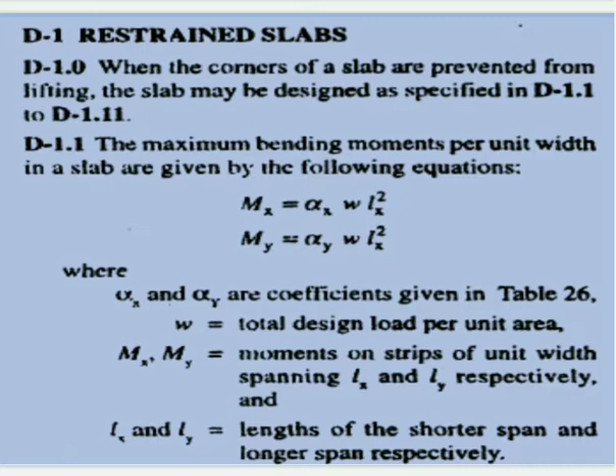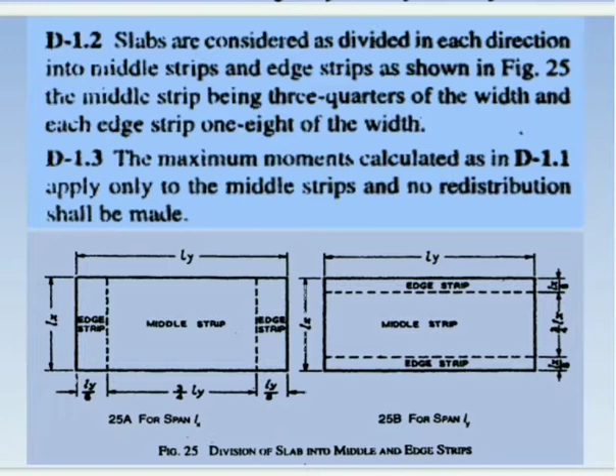Going further, in a restrained slab the reinforcement to be provided is divided into two strips: the middle strip and the edge strips. This happens along both spans, that is along Lx as well as along Ly. A detailed description of this is given in clause D1.2 of IS 456 2000.

Next is the different types of slabs as per the IS classification based on edge conditions. Edge conditions play a very important role in the design of slabs because, depending on the edge condition, the position of the reinforcement will be decided. We have 9 cases, starting from interior panel number one, where all four sides of the slab are continuous, and that panel falls somewhere in locked surroundings.

The second condition is one edge continuous, that is the short edge continuous. The third condition is one long edge discontinuous. Next is two adjacent edges discontinuous. The next condition is two short edges discontinuous. Next is two long edges discontinuous. The seventh is three edges discontinuous with one long edge continuous. The next condition is three edges discontinuous with the short edge continuous, and the last condition is four edges discontinuous.

Always remember, while solving examples based on the restrained slab, if any edge condition is not given, you have to assume it is condition number 9, that is all four edges are discontinuous, as shown in the figure below, where all four edges for slab number 9 don't have any continuity on any side. So if in an example no edge conditions are mentioned, directly go to condition number 9 for selecting alpha x and alpha y. Whereas if the conditions are mentioned, you have to select the proper condition from 1st to 8th.

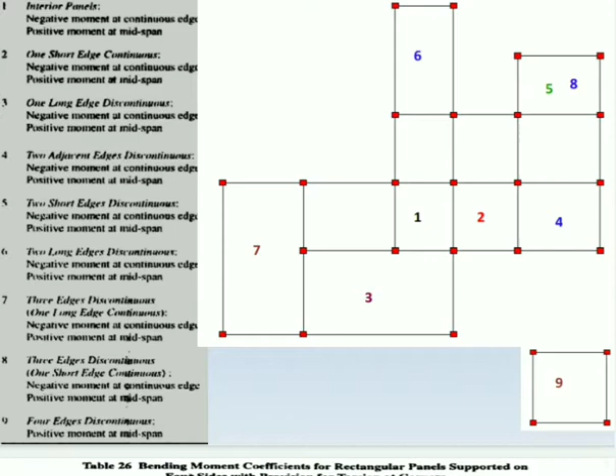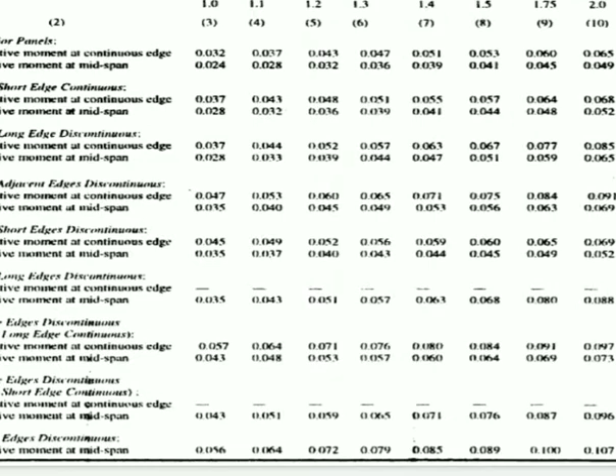Then this is the table which will give you the alpha x and alpha y coefficients. So depending on your Ly by Lx ratio, you have to select the proper edge condition and select the proper alpha x and alpha y value. This will be more clear when we solve one example.

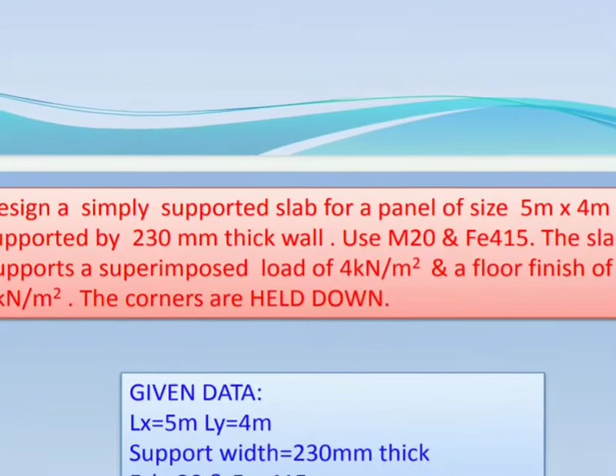Now let us start with a design example for a simply supported two-way slab with corners held down. The example goes like this: Design a simply supported slab for a panel of size 5 meter by 4 meter, supported by a 230 mm thick wall. Use M20 and Fe 415. The slab supports a superimposed load of 4 kN per meter square.

And a floor finish of 1 kilonewton per meter square. The corners are held down.

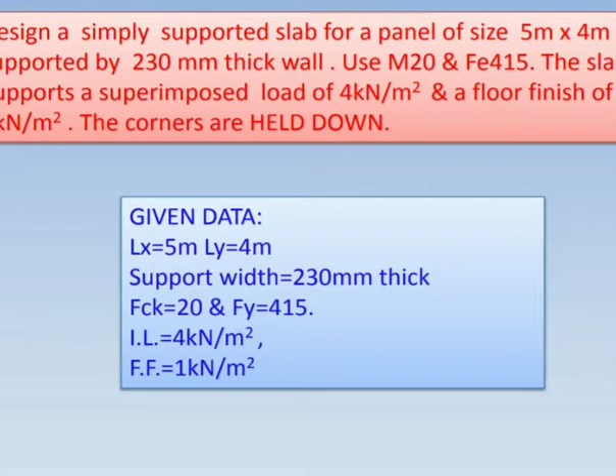So let us first note the given data. Lx is equal to 5 meters — sorry, Lx is equal to 4 meters, Ly should be 5 meters, please make the correction. Support width is 230 mm, FCK is 20, Fy is 415. Live load is 4 kilonewton per meter square and floor finish is 1 kilonewton per meter square.

So let us start with the check. Ly by Lx — the longer side is 5 meter, shorter side is always Lx, which is 4 meter. So we get a Ly by Lx ratio of 1.25, which is less than 2. Hence we have to design the slab as a two-way slab.

So now what happens here is we have to go for the design of a two-way slab, but the edge conditions are not mentioned clearly. Hence, as I told you earlier, we have to refer condition number 9 for taking the coefficients alpha x and alpha y, so we have to read the example carefully. As it's a restrained slab but no edge conditions are mentioned, it indicates that you should refer the ninth condition of the IS 456 code book table number 26.

So further in the example we'll come across it.

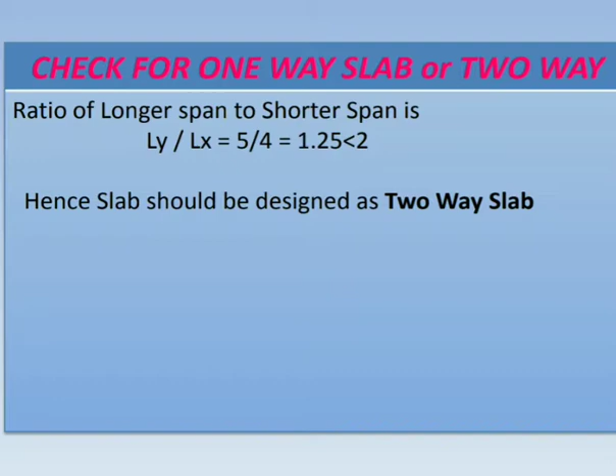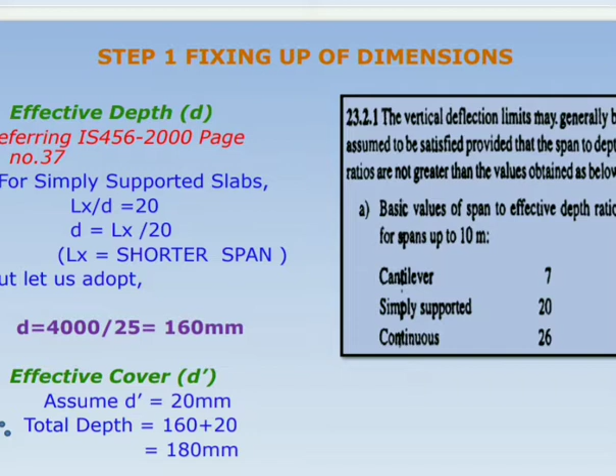So the first step, this is a common step wherein we'll be fixing the dimensions. On the right side is the reference of the IS 456 code book, which says that effective depth for a simply supported slab will be the shorter span divided by 20, okay, d is equal to Lx by 20. But practically, let us adopt L by 25 as the ratio and we get depth as 160 mm. Then the effective cover is assumed as 20, so the total depth of the slab comes out to be 180 mm.

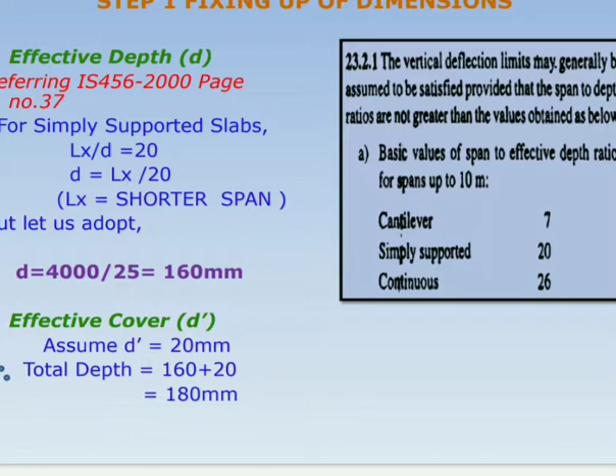Further, let us fix the effective length. Now as it is a two-way slab, the effective length needs to be fixed up in both directions, that is we got to fix up the length in both the directions — Lx effective as well as Ly effective — using our regular formulas from the IS reference.

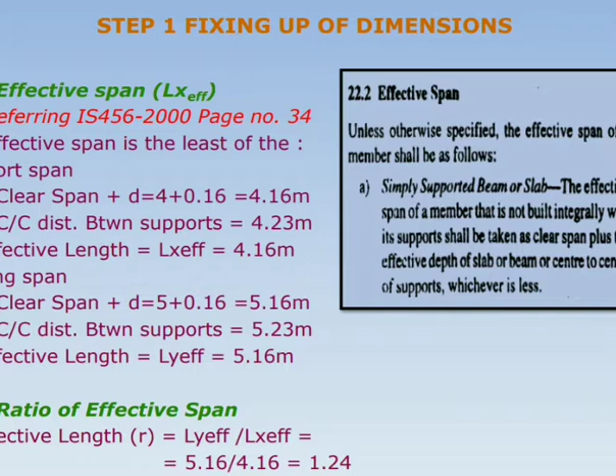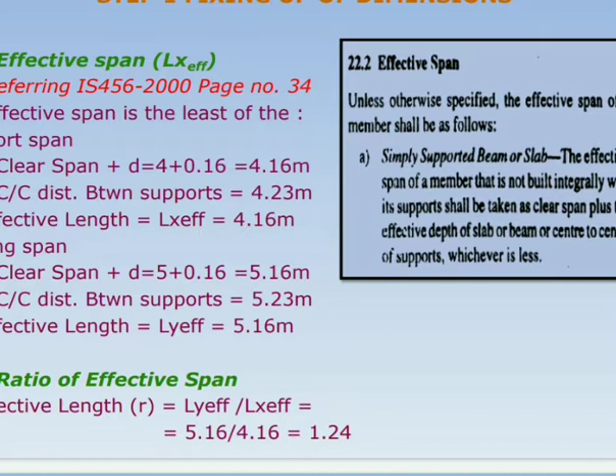Effective span along the x direction, that is the shorter span, is clear span plus effective depth, or center to center distance between the supports, whichever is least. So here we can say that the effective length is 4.16 meters. Similarly, along the longer span, we get an effective length of 5.16 meters. So let us find the effective length ratio R, which is Ly effective upon Lx effective, which comes out to be 1.24. Now these steps are basically repeated from your beam design onwards, and hence you should be able to do all these steps very fast.

So next comes the step of load calculation. As repeated earlier, always remember that for slabs you have to find the load considering a 1 meter width strip of the slab. Hence B in all calculations will come out to be 1 meter or 1000 mm. So let us go ahead with the load calculation: self weight, floor finish, imposed loads — these are the three loads which we need to calculate. Self weight is nothing but the total depth into density of the slab, multiplied by 1 meter, because we designed the slab for a strip of 1 meter width.

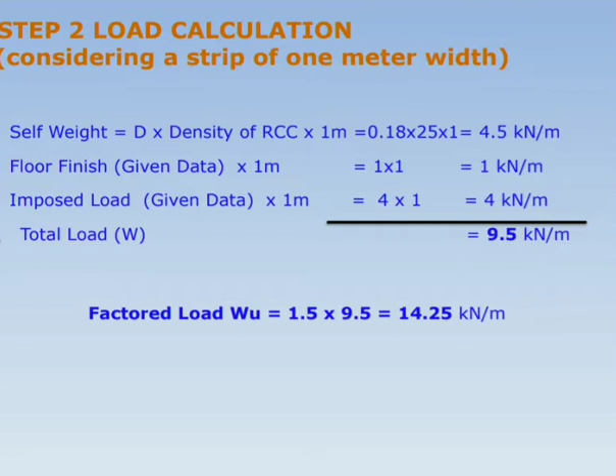Similarly for floor finish, let us multiply by 1 meter, then the imposed load, which is the given data. So total load we get as 9.5 kilonewton per meter, which is in the form of UDL. Now let us multiply this load by a factor of safety of 1.5, hence we get a factored load WU equal to 14.25 kilonewton per meter. Again, this step is very similar and easy.

So now comes the important part of the restrained slab — calculation of the design bending moment. So when we refer to page number 91 of IS 456-2000, this clause was discussed in the earlier discussion.

Mx is given by alpha x into w lx square, and my is equal to alpha y into w lx square. In both calculations, only alpha x and alpha y values change, else w and lx remain the same. Don't multiply here by ly, else your sum will go wrong.

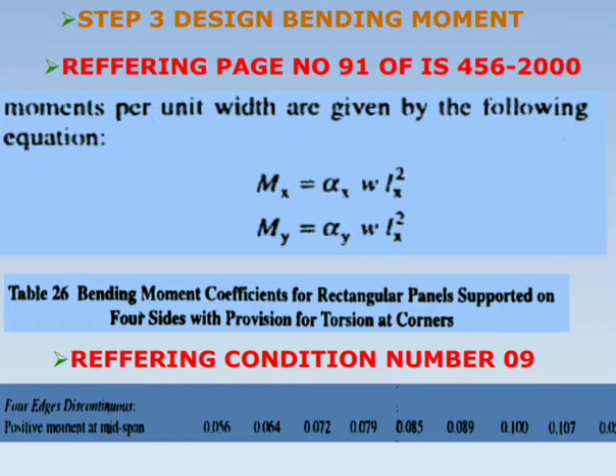As no edge conditions are given, which case do we refer to from table number 26? Yes, we refer to case number 9 from table number 26, as there are no edge conditions given. So let us take the values of alpha x and alpha y.

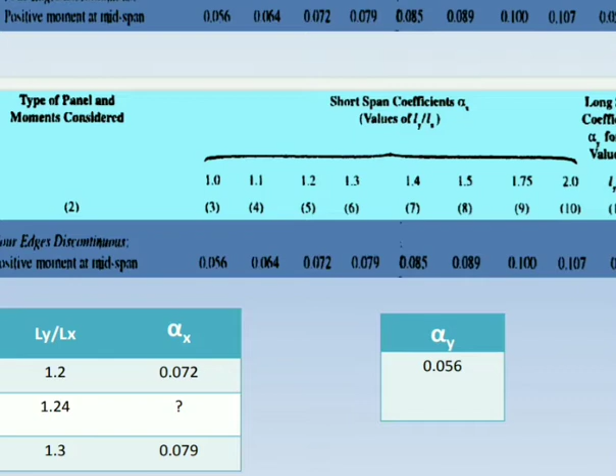Now the table is clearly visible to you all. For our alpha x, Ly by Lx effective ratio of 1.24, we will be selecting alpha x and alpha y values between 1.2 and 1.3. For 1.2, what is the alpha x value? 0.072.

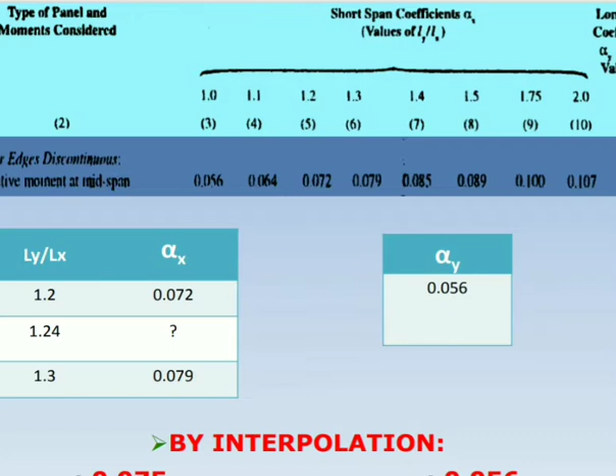For 1.3, check that value too. For 1.3, what was the value? 0.079. Our effective Ly by Lx ratio is 1.24, hence by interpolation we can find alpha x. Now alpha y can be directly taken as there are no different values here, that is 0.056. So alpha x by interpolation we get 0.075, and alpha y we keep as it is.

Now this is how we got to find the values of alpha x and alpha y for our slab.

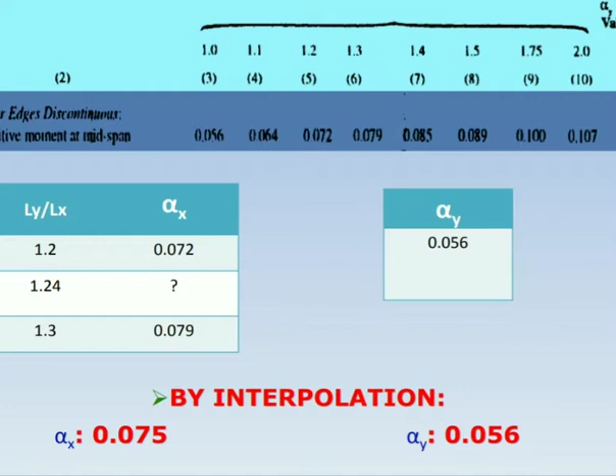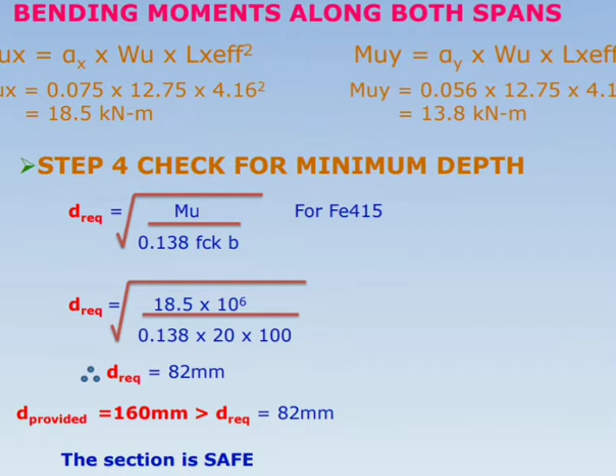Bending moment along both the spans. Let us go ahead with the calculation of bending moments. Mux is equal to alpha x into wu into lx effective square. Muy is equal to alpha y into wu into lx effective square only. Substituting the given values, we get mux equal to 18.5 kilonewton meter and muy equal to 13.8 kilonewton meter.

What you have to remember here is, you will always get the bending moment along the shorter span with a higher value. If you get muy higher, then you have made a mistake somewhere. So this is one checkpoint for you all, where you have to see that the mux value is greater than the muy value, because the slab bends more along the shorter span as compared to the longer span.

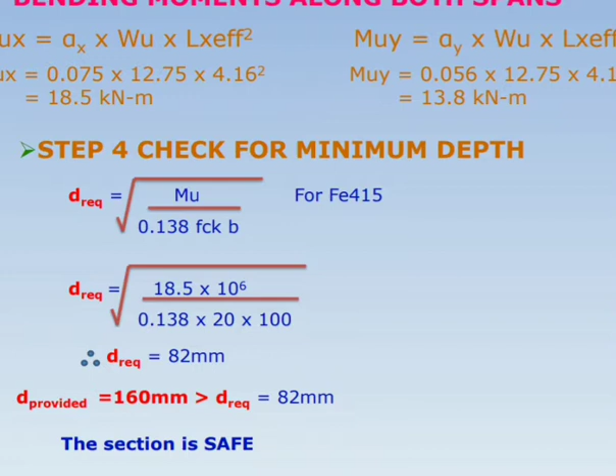Now let us go ahead and check out whether the depth we have provided is sufficient or not. So for the check of depth, for Fe415 grade of steel, D required is equal to square root of mu upon 0.138 FCKB.

Let us take mu value as 18.5, which is the higher of the two, because if the given depth is able to satisfy the higher moment, it will of course satisfy the lower one. Substituting the values, we get D required as 82 mm. So we have provided 160 mm, which is more than sufficient compared to the required.

This is only as per bending consideration. Further, when we take deflection and all into account, a higher depth will be required. Don't think that only 82 is required, we are providing 160 - only bending doesn't govern the design criteria. There are other factors also which have to be taken into consideration. So this depth provided passes in this check, hence we can conclude that the section is safe.

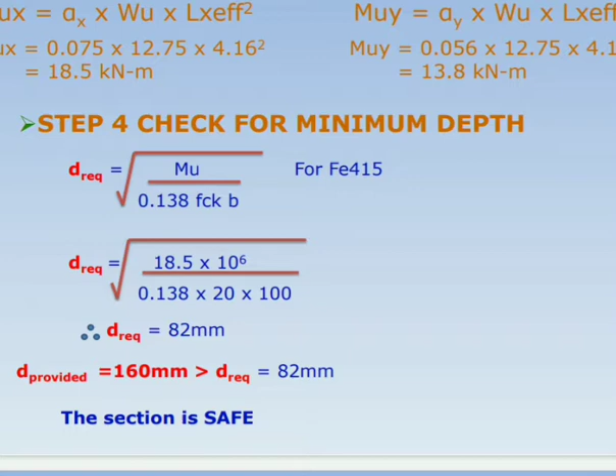Going further, now this is the most important thing in the design of a restrained slab. The reinforcement needs to be divided along two parts or two strips, that is the center strip and the edge strip. I have shown with hatch marks the center strip as well as the edge strip. So width of the middle strip is 3.87 and width of the end strip is 0.645 when you consider the shorter span.

Then when you consider the longer span, width will be 3.12 and end width will be 0.52. So here you have to be careful while taking the strips. When we take the bending along the shorter span, the longer length will come into consideration, and when we take the bending along the longer span, the shorter length will come into consideration. So don't get confused - these are taken from IS 456 codebook.

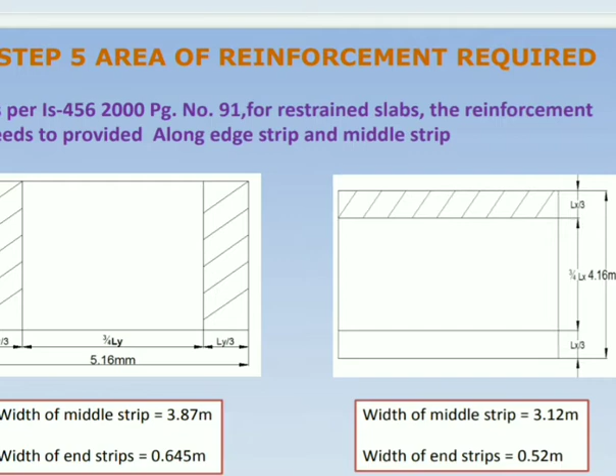So let us find the area of reinforcement along the shorter span, where the longer length will come into picture. For the middle strip, we calculate AST x required, substituting the values in this formula. Practicing this substitution is very much important.

The MUX value we substitute and get AST required as 335 mm square. Selecting 8 mm diameter bar, we get a spacing of 150 mm center to center. When we compare with IS 456 regulations, this 150 spacing is least of the three options available to us. Hence let us provide 8 mm diameter bars at 150 mm center to center as main reinforcement along the middle strip for shorter span.

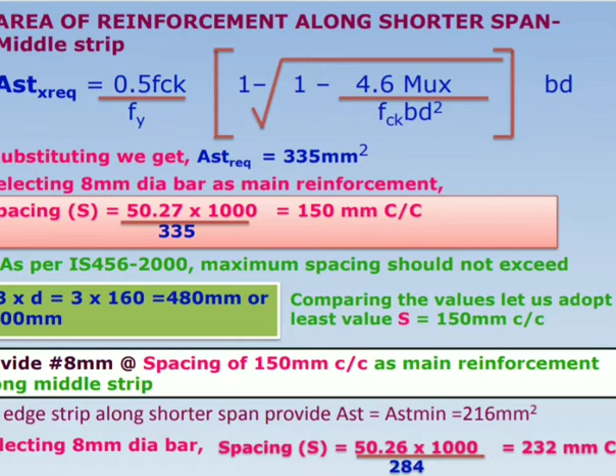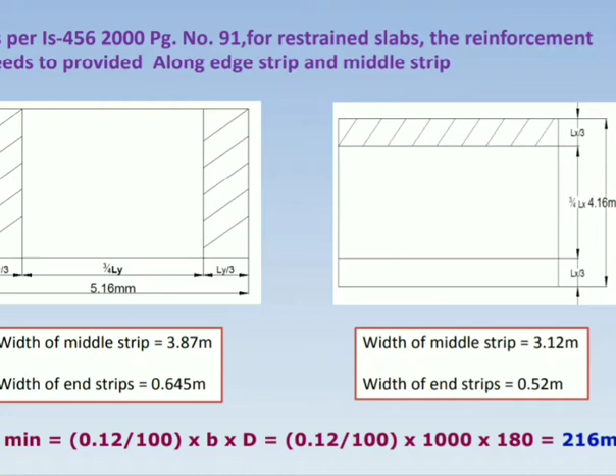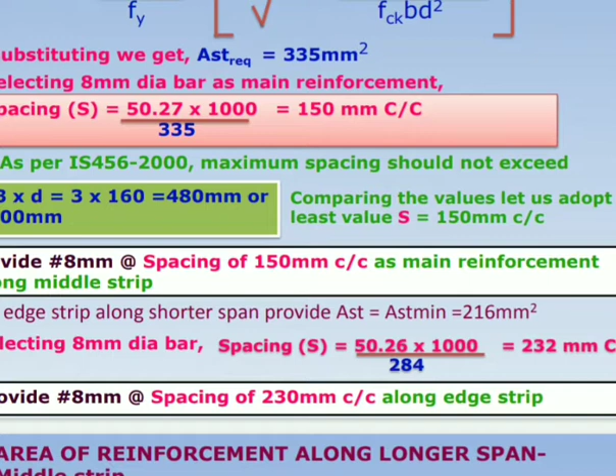Then for the edge strip along the shorter span, we can provide AST equal to AST minimum itself. Previously we calculated AST minimum, which is 0.12% of BD, and this came out to be 216. Now we are directly using this 216 and providing it as reinforcement for the edge strip.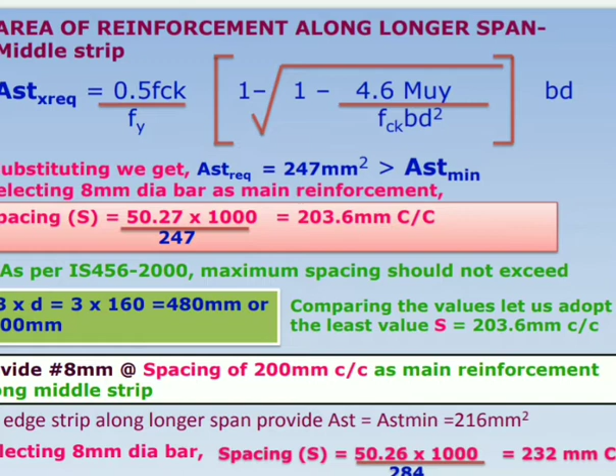Going further, the area of reinforcement along the longer span: here we substitute the value of MUY and get AST required as 247 mm square, which is of course greater than AST minimum. Again using 8 mm diameter bars, we get a spacing along the middle strip of the longer span as 200 mm, rounded off.

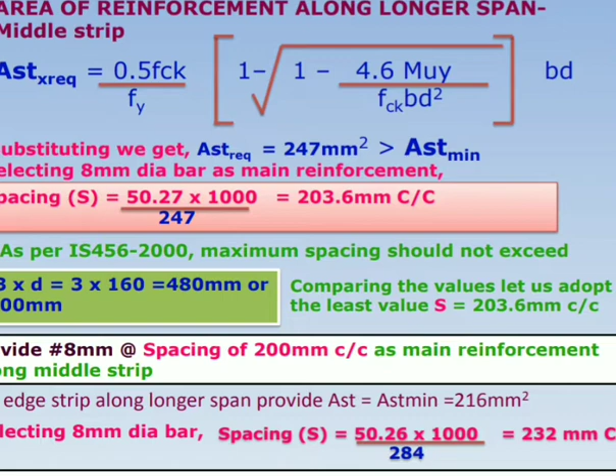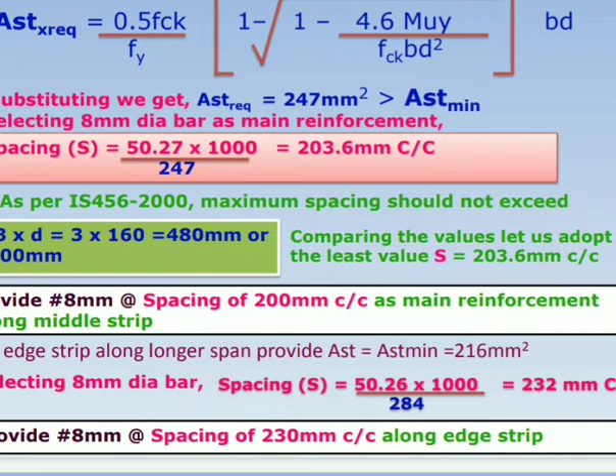Again for the edge strip we can use AST minimum. Once we use AST minimum, we get a spacing of about 232, but let's provide a spacing of 230 mm center to center for the edge strip reinforcement along the longer span.

So here I have summarized the reinforcement provided from the design along the longer span and the shorter span. I think I have made a mistake - the 150 mm steel should be along the shorter span because it is more, and the second one should be along the longer span. Please excuse me, make a note of it. First is the shorter span middle strip, then second is the longer span middle strip, because the shorter span is bending more than the longer span.

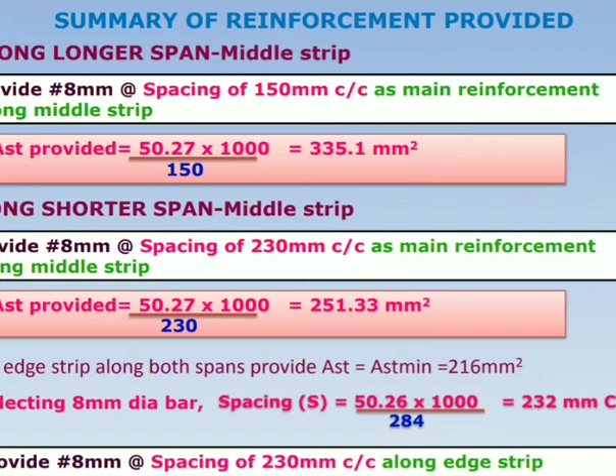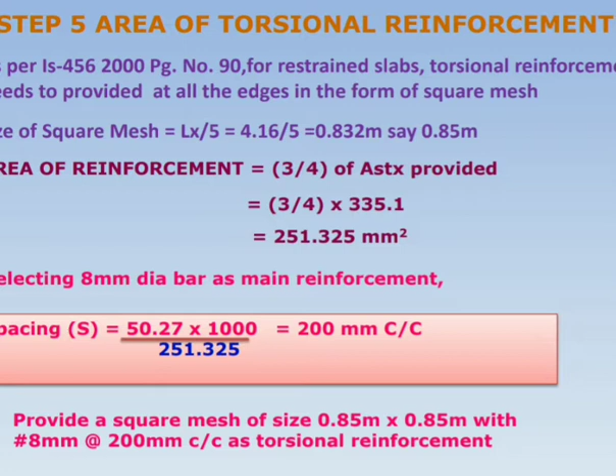Then this next step is there only in case of the restrained slab: providing torsional reinforcement, as per IS 456-2000 page number 90. We have to provide this reinforcement in the form of a square mesh, with size Lx by 5. Lx is the effective length in x direction, 4.16 meters, divided by 5 equals 0.832 meters. Let us assume it as 0.85, so we provide a square mesh of size 0.85 by 0.85.

So we provide this reinforcement in the form of a square mesh of 0.85 by 0.85, and the area of reinforcement as per IS 456 will be 3/4 of ASTX provided, which we already calculated as 335.1. So 3/4 of 335.1 comes out to be 251.325. Selecting 8 mm bar diameter as main reinforcement, we get spacing equal to 200 mm.

So for torsion, in case of a restrained slab, we provide a square mesh of size 0.85 by 0.85 meters, with 8 mm diameter bars at 200 mm spacing center to center. This is what is required in the design of a restrained slab, where corners are not free to lift but no edge condition is given, so we directly use case number 9.

In the next example, we will discuss one more slab design with some edge condition, so that we can complete all the required things in slab design. Thank you very much.